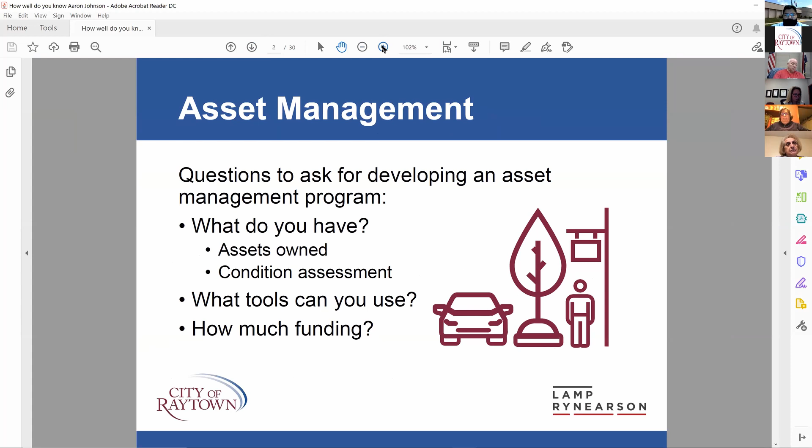So we're here to talk tonight about our pavement and our plans, after my evaluation of where we are here in Raytown, and what we believe are the best practices moving forward in terms of street maintenance. Whenever we're looking at our assets, and I know some of you have probably heard a lot of this before, but it's good to hear again: we're looking at what do we have, what streets do we own, what is the condition of our assets, our streets, what tools can we use, and finally how much funding do we have to do any sort of work.

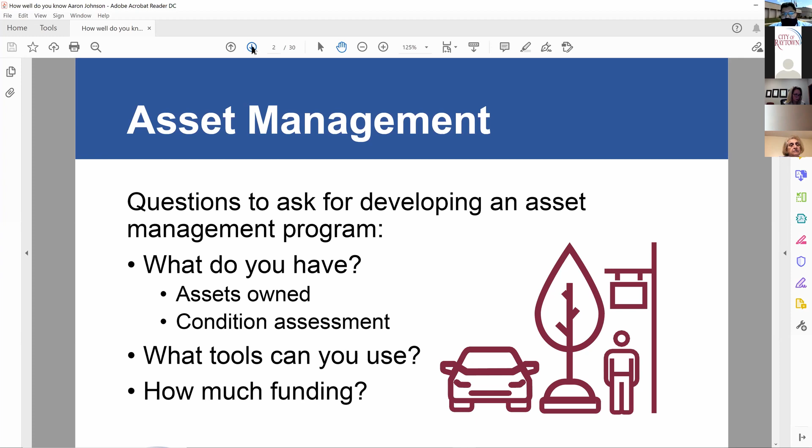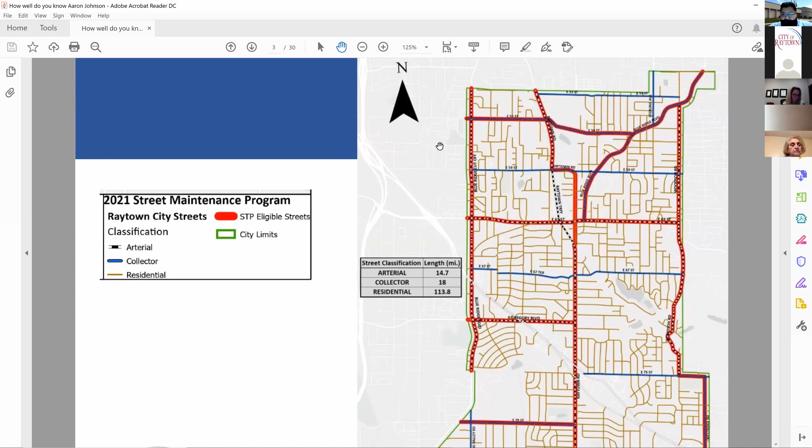This is a look at what we own. In the red, you'll see our arterial streets in the city, and then we have collector streets in the blue, and then of course our residential streets in the yellow. Altogether, we've summed this up in miles for you all to see how many miles we have in Raytown. Quite a bit of street. So approximately 330 lane miles of pavement in Raytown: arterial we have 52 lane miles, collector 38 lane miles, and residential, we have the most, 240 lane miles.

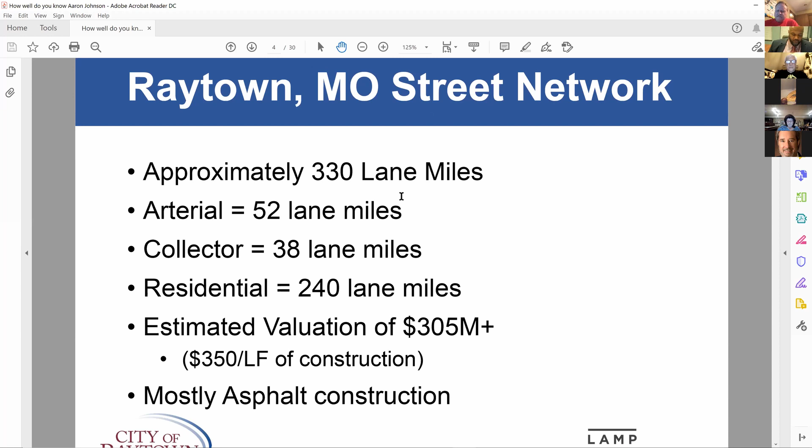We did an evaluation of our streets, with about $305 million being the valuation of our street network. And that's if we took about $350 a linear foot of new construction - if we were to just build our streets today, brand new, this is the value of them. And of course, as you all know, most of our streets are asphalt construction.

So whenever you get into pavement management, there's a lot of good material out there. A lot of engineers, a lot of scientists have done a lot of studies on asphalt, concrete, streets in general. And really the resounding theme that you get out of this is keep good streets good. Keep your good streets good - that's where your focus should be. So that's kind of the theme that we're going with this evening, is keep good streets good.

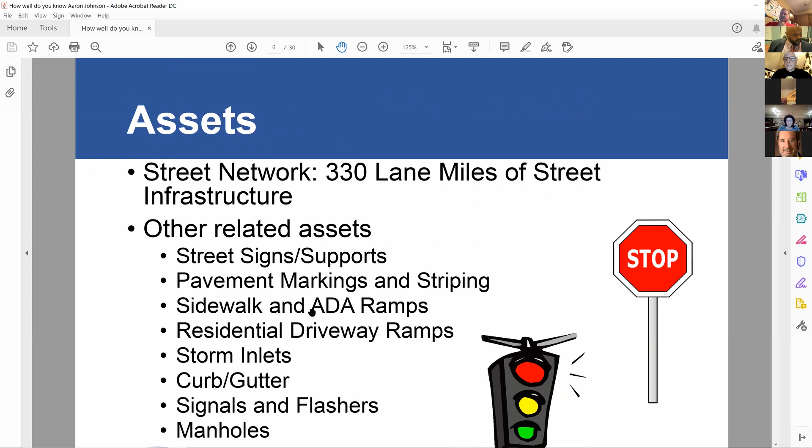It's important to note that our street network isn't just pavement, it's not just asphalt and concrete. There's also a lot of other types of assets there: street signs, markings, striping, sidewalks, ADA ramps, driveways and approaches for houses, storm gutters, signals and flashers, manholes that you see off the street or on the street. So there's a lot of other things we have to take into consideration when we're talking about doing pavement street maintenance.

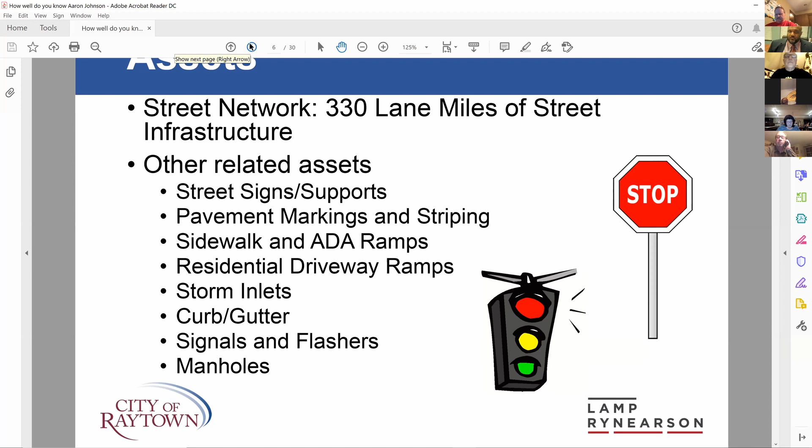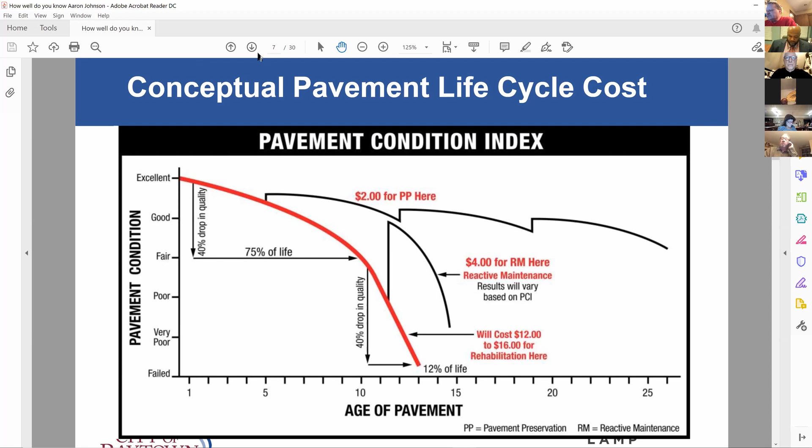So just simple math using that curve of the life of a street: if on average we touched our streets every 8 years to keep up the street maintenance, to keep the value up, or to keep up the funding and our contribution — to keep up our funding and the pavement life — if we were to touch the roads every 8 years, we should be doing in Raytown about 41 lane miles a year.

So that's a reminder, 330 lane miles. If you divide that by 8 years, 41.25 lane miles a year is what we should be doing. That's about 12% of our street network that we should be maintaining annually. One important note is that this should be a coordination between what we do in-house in street maintenance with our own staff and what we contract out. They should be complementing each other.

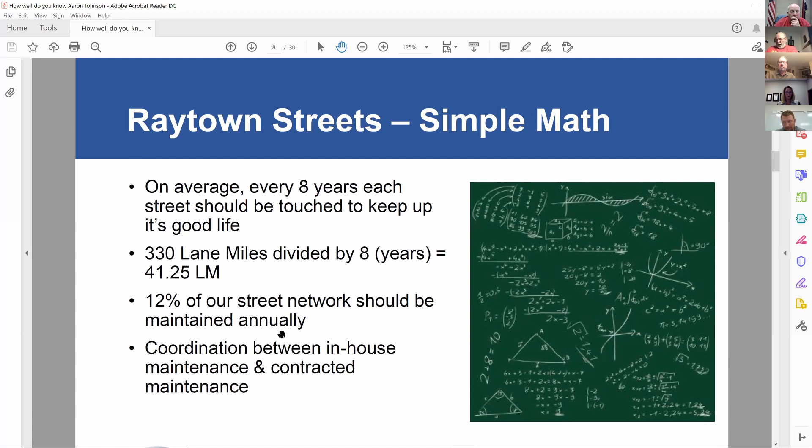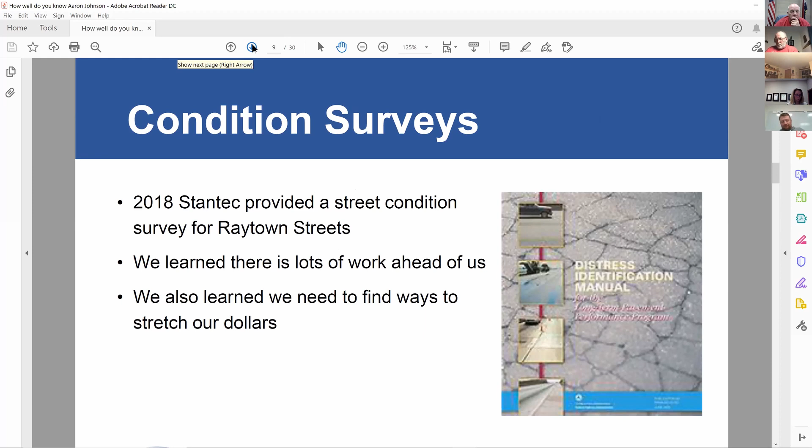So some more about what we know: in 2018, Stantec came into the city and did a street condition survey for our streets. They provided a lot of good information. I know some of you were here when they did that. Basically, we know that our streets are bad. We have a lot of work ahead of us, and we also learned we need to find ways to stretch our dollars. That's really one of the most important points this evening — we've got to find ways to stretch the dollars we have, because as we all know, we don't have a lot of dollars in street maintenance.

PCI stands for Pavement Condition Index. So when I say PCI tonight, that's what I'm talking about. It's a nationally used measurement for pavement condition. The range is 0 for the worst and 100 for the best.

PCIs greater than 70 generally are good to excellent condition — they have surface or joint problems that we can manage. PCIs between 70 and 55, that's a really critical range for us in our streets. This is where a lot of times we should be spending a lot of our focus, because if we're not giving our streets attention, keep in mind that curve, that failure of the curve, if we're not giving our streets attention in this range, this will continue to dip down into the range below 40. So then it becomes a failed or failing pavement, and it's really expensive to repair.

One important note to take out of this is that Raytown's pavement average PCI is 42. So we're just above this area here. That's a really important number to note. When we talk about performance measurement, we're going to look at this as staff and see what our first goal is on raising this number.

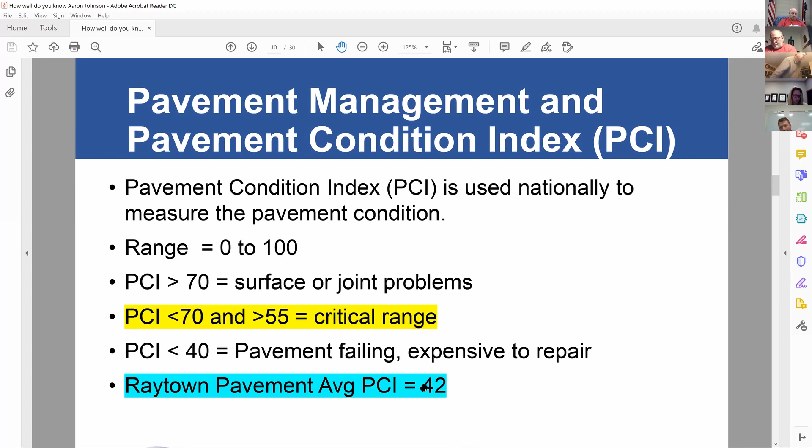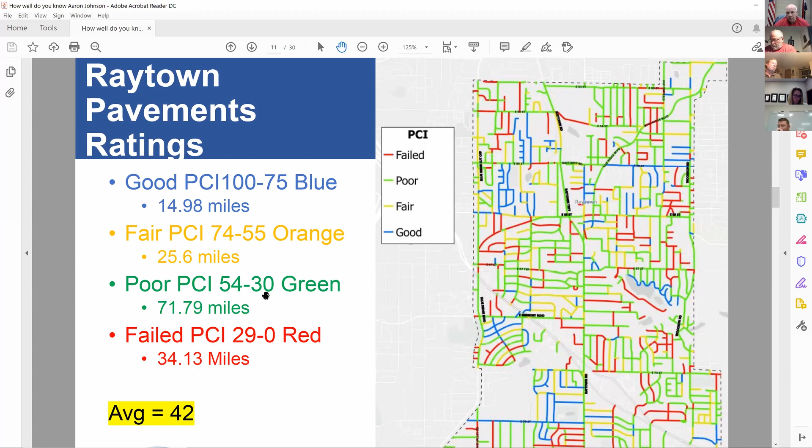So specifically, when we talk about PCIs, this is from the 2018 Stantec survey. We had about 15 miles of street that are good pavement, about 25.6 miles that are fair, about 72 miles that are poor, and these are all color coded to match this map. And then we have a little over 34 miles of pavement that is failed. We broke this into 4 conditions for you so you can see this map. Keeping in mind that our average PCI is 42, we're right in here in the poor condition as a city.

Just a quick summary of what we've done, going back to 2013. Where have we spent money on our streets? What did we do exactly?

In blue on the right, you'll see a map of the mill and overlay we've done between 2013 and 2020. And in red, the chip seal work the city has done between 2013 and 2020. These are the dollar amounts we spent for those years. One thing to note is that in 2018, it looks like the city did not have a street maintenance program because we spent that money on the 83rd Street Bridge. And there's a couple years where we really didn't do much work altogether.

In 2016, we did about $37,000 worth of concrete work. I'm not sure what that was exactly, but we went a couple years not really doing much. In 2020, same thing.

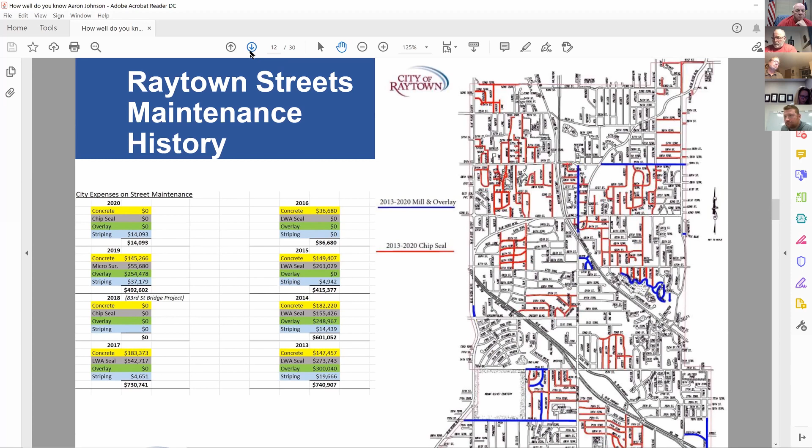And really what that means is doing more routine maintenance, which includes crack sealing, and preventative maintenance, which is surface treatments, chip seals, micro surfacing. There are some other ones we'll talk about this evening.

Again, just a reminder, based on some simple math, we should be touching about a little over 20 miles annually, or 41.25 lane miles.

The other thing we needed to do as a city is develop a financial plan for deferred maintenance and/or reconstruction. Those are the poor streets that it's not worth our dollars to invest in, or those failed streets that would just take too much money for us to rebuild. So we've got to develop a financial plan. We can't completely ignore that.

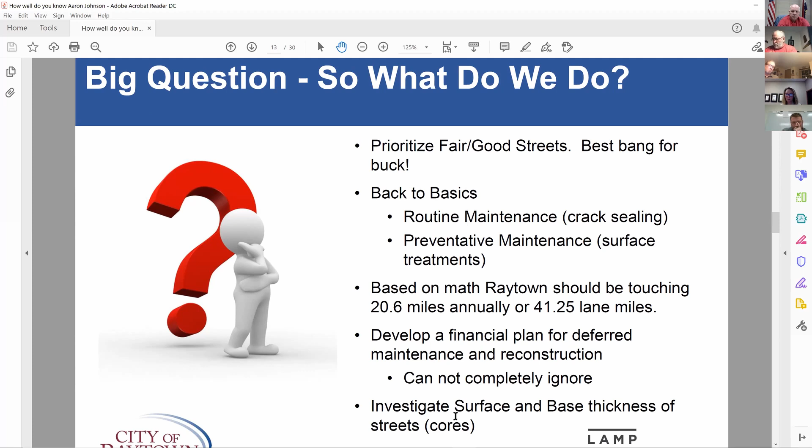And then we also want to get into the practice of investigating surface and base thickness of our streets. We'll talk about coring here in a second, that we want to start implementing here in Public Works.

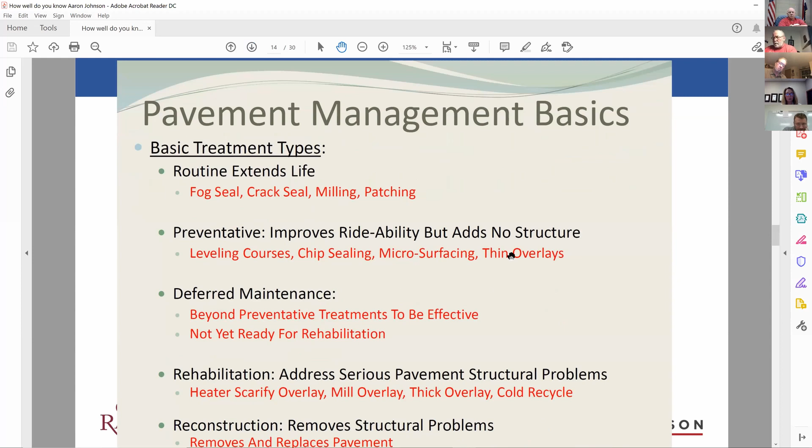So just some basics of pavement management. You've got your routine maintenance, which extends life—fog sealing, crack sealing, milling and patching—and preventative maintenance. This is your chip sealing, micro surfacing, some thin overlays. You have your deferred maintenance, which I spoke to earlier, which is it would be too much work for us to do, or at the moment we can't afford to do any work.

So we would probably let that go, since it's not ready for rehabilitation, which is more of a mill and overlay approach, or a thick overlay. Then you also have your reconstruction, which removes your structural problems—your base issues, things like that—and that's full reconstruction of the road, full reconstruction of the street.

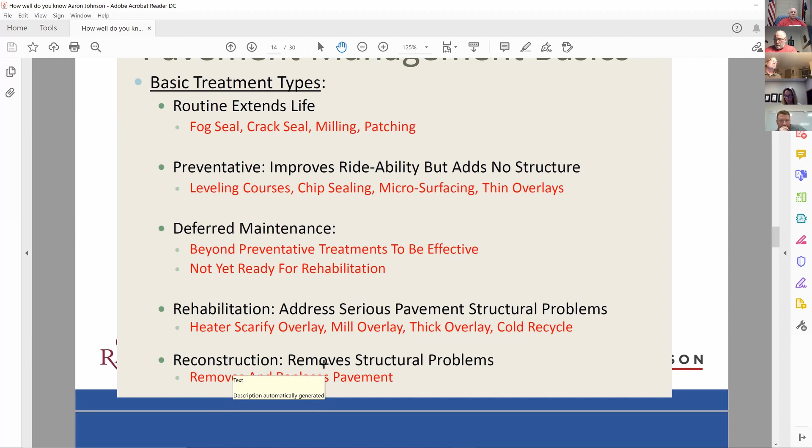So there's several different types of street maintenance. I'm going to talk about a couple that I fully believe in, that are proven strategies the city is not foreign to, and hopefully some that we can bring into the city that are a little bit newer in the market. I think you all are familiar with crack seal.

It's about $1.45 a pound. This is the black lines you see on the street that fill the cracks. It's a protective, preventative measure. It's really important because water getting into the pavement and into the subsurface is really what destroys our streets.

Granite chip seal, micro surfacing, ultra thin bonded asphalt surface—which is an acronym, UBAS—is another good approach. You're all familiar with mill and overlay, which is the more expensive approach. One important thing is that these dollar per square yard or dollar per pound figures don't include striping and some of the other things included in these projects. The most important thing here is we want to stretch our dollar by using a variety of maintenance strategies.

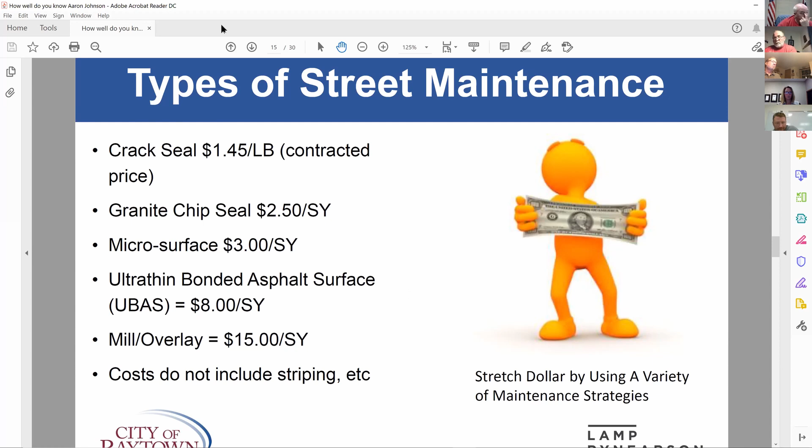To illustrate that, here's an example. This is our budget this year: $350,000 for contracted street maintenance. So if somebody were to say, Jose, why can't we just go mill and overlay everything? Well, mill and overlay takes us to about 0.83 miles, a little under a mile, and that's how much work we'd be able to do in the city.

UBAS, which is a little more expensive than chip seal but less expensive than mill and overlay, gets us about 1.5 miles, so we're doing about double the work. You can see that here on the right. And if you use a method like chip seal, you're doing over 4 miles of work based on that same budget.

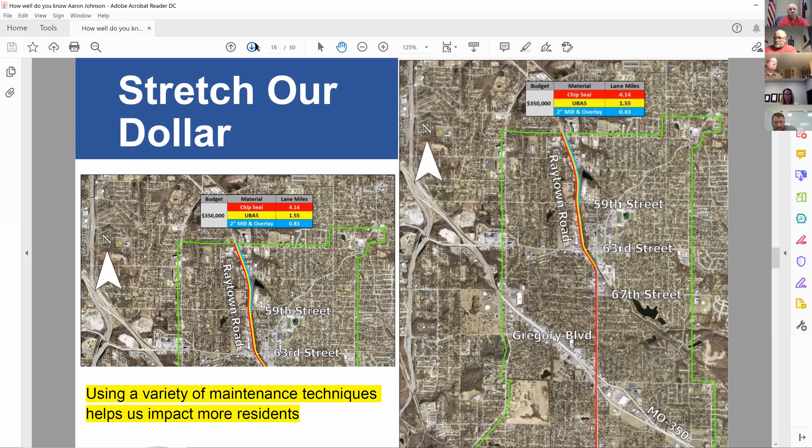The point we're trying to make with this illustration is that we can't be stuck on one method. We've got to use a variety of maintenance techniques to help impact more residents, help us stretch the dollar. More residents will see the improvement across the city, keeping good streets good.

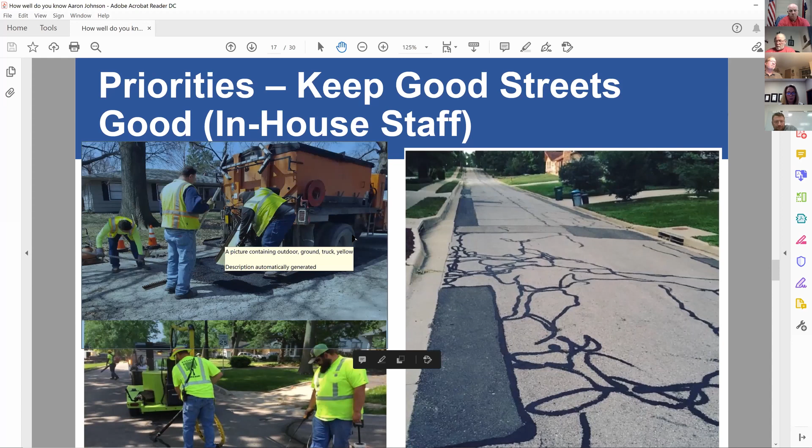Again, the point is we want these efforts to complement each other. What we do in-house with our staff, like base repairs and surface repairs, we want to make sure is done on streets that we intend to invest more money in in the future. So what they do in-house is going to complement the work we do on the contracted side.

This is the base repair our staff did in-house, and this is crack sealing. This is actually a former community I worked in. We started crack sealing our own streets, which is something we're going to evaluate here in Raytown. We're going to contract out crack sealing this year and most likely next year.

But ultimately, this is what we want to see. I know you're thinking, well, that doesn't look very pretty - I don't want to walk outside or drive down the street and see that. What we call this is prep work, where our crews or contractor have gone in and removed bad surface or bad base. This is actually a settled pavement where a pipe was put in and the pavement settled, so we went in, put in fresh surface, and then crack sealed everything afterward.

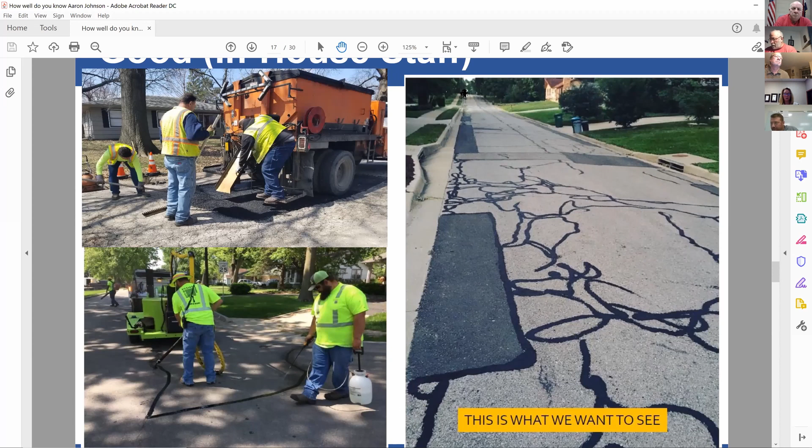So why do we do that? We'll talk about that here in a second.

Just a recap of our budget: we have $150,000 for the crack seal budget. Again, it'll be contracted this year and next year. We're going to evaluate that function for an in-house role in the future to see if our staff can do it. Hopefully one day we'll be fully staffed up, and I think it's something we can do.

This will be a priority operation for Raytown, whether it's contracted or performed in-house. This is a priority. Crack sealing is the bare minimum we should be doing in terms of street maintenance in Raytown.

In-house patching, looking at the first 2 inches of surface and base repairs on those fair and good streets in the city, preparing those streets for preventative maintenance. That photo I just showed you - that's prep work.

And then we have $350,000 for the contracted street maintenance budget - preventative maintenance, contracted preventative maintenance. We'll look at contractors who can assist in patching and base repairs as needed, and if we need to do some mill and overlay, we'll do that where it makes sense.

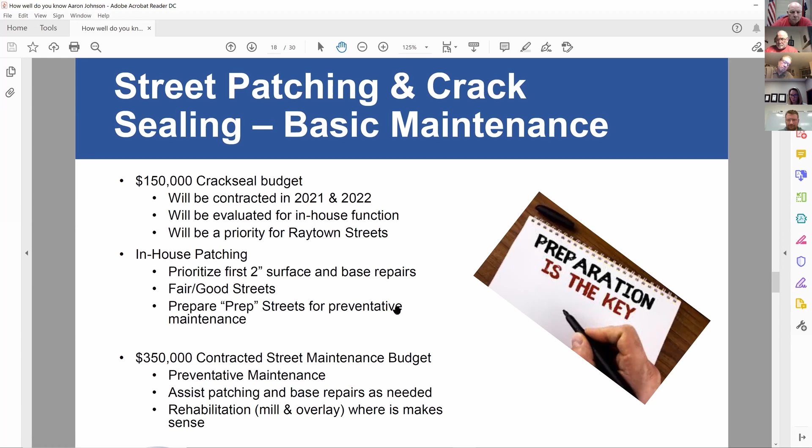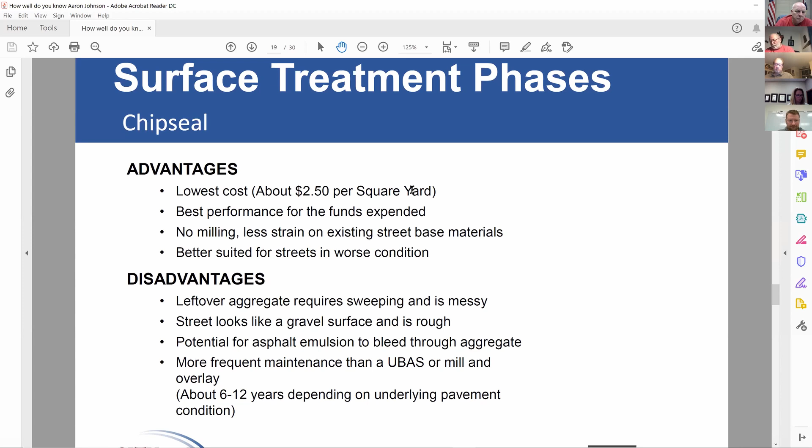So chip seal has a lot of advantages and disadvantages. One of the advantages is it's one of the more low-cost but effective measures of street maintenance. There are several disadvantages - I really don't have time to go through all of these - but this is something that is very effective and it works. Many communities do it.

One of the things I wanted to illustrate is what does it look like. You guys have seen chip seal in the city before, right? What I'd like to bring in is a new approach to chip seal: first, we go in and remove areas where the surface needs repair or base patching needs to be fixed. We come in afterward and crack seal those areas, crack sealing the whole street. Then we bring in our contractor the following year to lay down the chip seal.

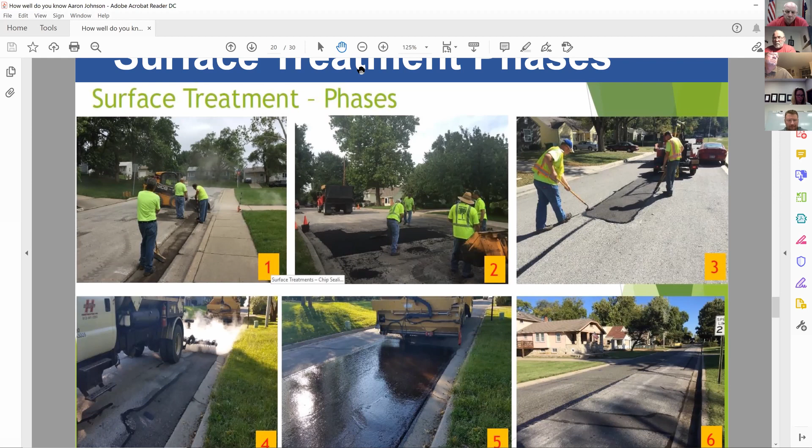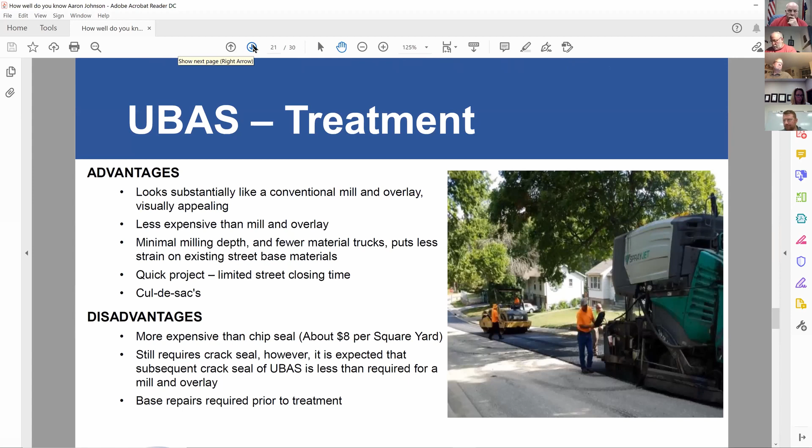UBAS is a thin bonded asphalt surface. It's a little bit more expensive than chip seal, but a lot less expensive than mill and overlay. It's really good for cul-de-sacs and areas that chip and micro surfacing isn't really ideal for.

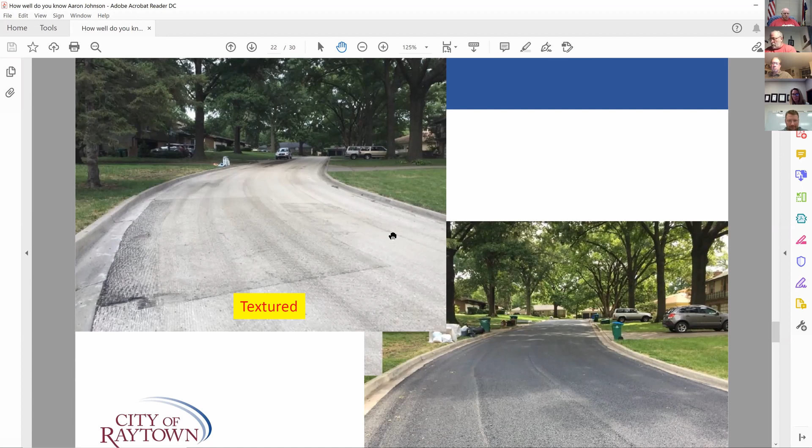It's a textured surface, so what that means is they take off the first 5/8 inch of surface. We have to make sure that the base of that is in really good condition, and then they lay on a brand new surface that's a thicker aggregate, a larger rock, if you will, with oil. It's a really good looking finished product, to say the least. It looks almost just like new asphalt.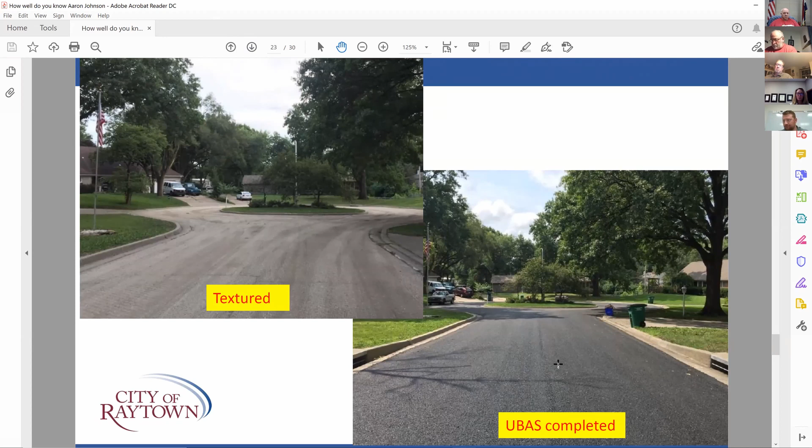So again, this is a cul-de-sac where they took off that 5/8 inch, and then they laid down this UBAS afterward. Mill and overlay, I'm not going to go through this very much. You all are very familiar with mill and overlay. You're removing the top 2 inches and you're putting down a fresh new 2 inches of asphalt surface. It's more expensive. It does fall apart within that first 7 years if you're not doing good maintenance on it, coming back and making sure that you're reinvesting dollars to protect that investment.

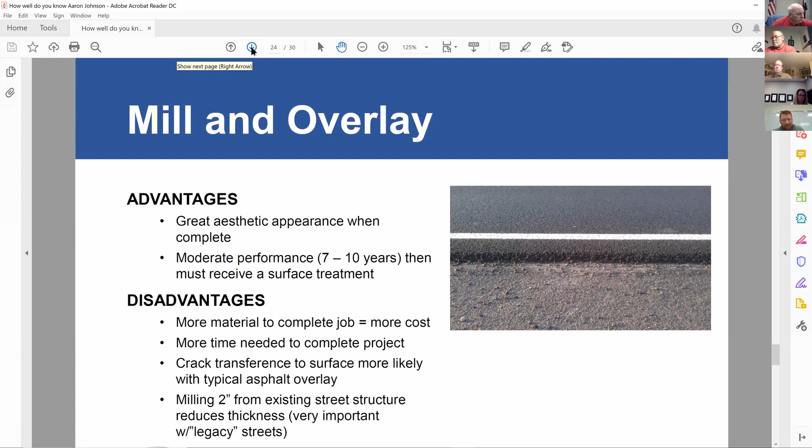Street coring, just real quick: we want to start coring our streets, and this will be in the fair and good areas as well, probably some of the higher poor areas, because we want to understand what is our pavement, how thick is it, is it really worth our dollar to put in new asphalt or chip seal or UBAS on those streets.

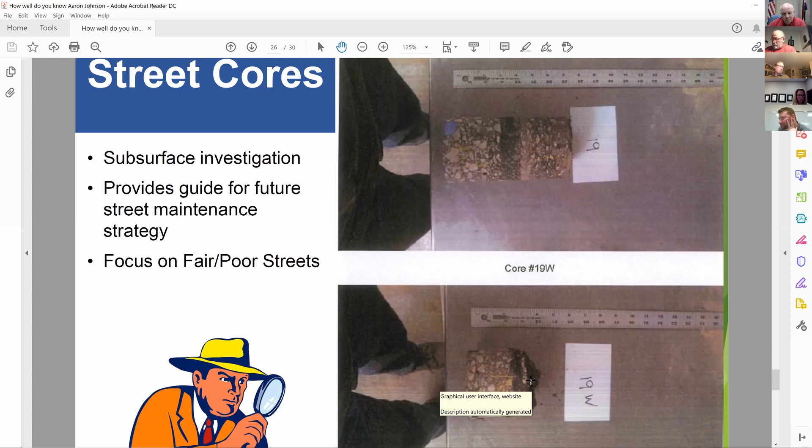As you can see here, this is actually the same street. This is on one side of the street, one area. It looks like about a 7 inch, 8 inch thick street. Other side of the street, it's about 4 inches. So you learn a lot by coring your streets. You learn a whole lot by coring your streets. And again, this is one thing that we want to bring in to the city here in Public Works.

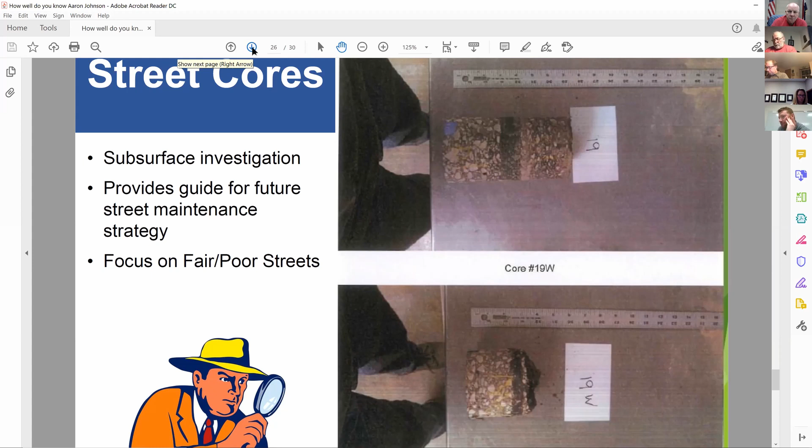So what this looks like is in 2021, we're going to start doing some prep work on our streets, focusing on those surface repairs, base repairs, crack sealing, getting our streets ready for what we're going to do in 2022, where we'll do some surface treatments, some preventative maintenance, UBAS, things like that. And then in 2022, we're going to do some more prep work on some more streets for 2023, but we're also going to, like I said, cover up the work that we did in 2021 with the surface treatment.

So it's an ongoing strategy. This does not end. This is something that we're just going to keep going. It's like a clock. We're just going to keep going through all of our streets until we touch them all one day.

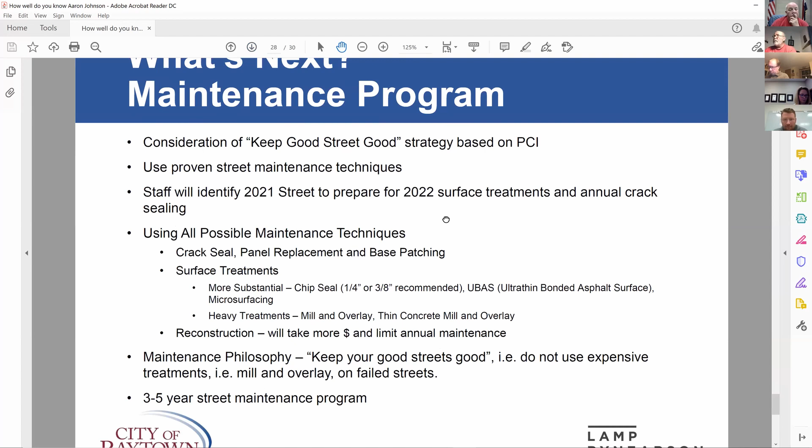Just real quickly, what's next for the maintenance program? Like I said, keep good streets good. That's going to be our slogan in Public Works. We're going to keep good streets good, use proven street maintenance techniques. We're going to focus on 2021 street prep and 2022 surface treatments with the annual crack sealing. Again, looking at reconstruction, we know that we need more money to restart a reconstruction program in the city. So that'll take care of those poor and failed streets.

And then here, I think throughout this year, really over the next 4 to 6 months, I'm going to be working with staff to develop a good 3 to 5 year street maintenance program for the city, so we're able to show you all what that looks like using this philosophy.

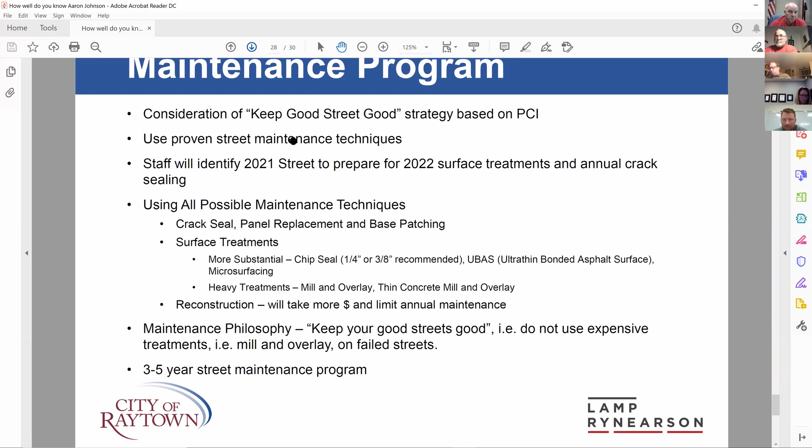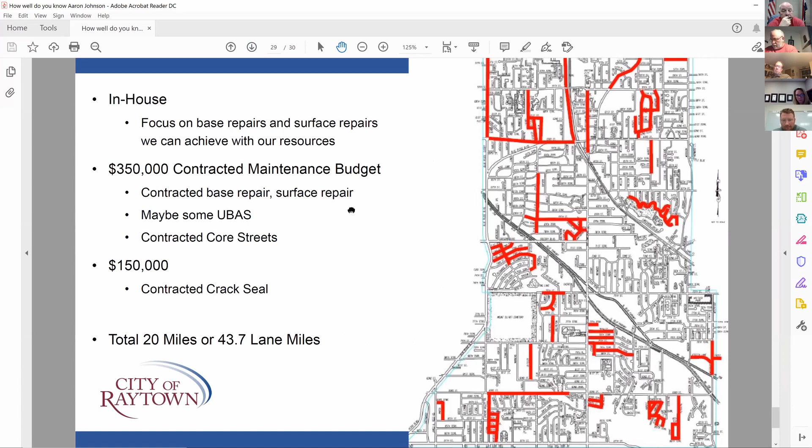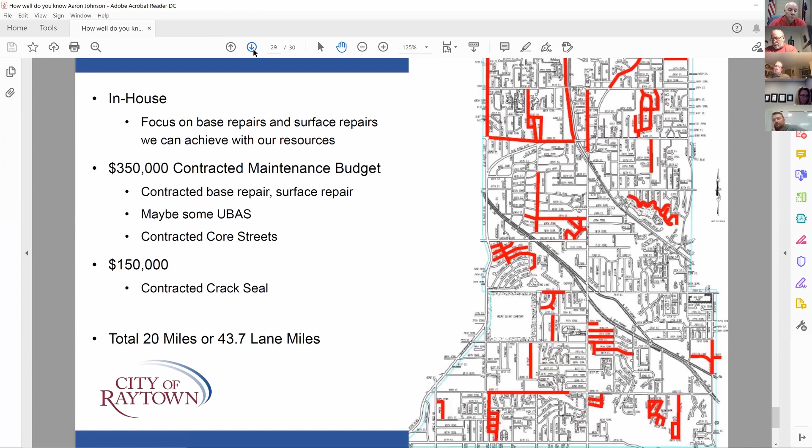This is a map showing just some candidates that we're looking at for these dollars that we have this year for crack seal and surface repair, base repair. All these streets have been identified as mostly fair and good streets that we want to continue to protect their life and don't let them fall into that poor and failed category. So this is really the streets that we're looking at this year to do that with. And that's all I got, Mayor.

All right. You want to take that? There you go. Thank you so much. Anybody got any questions for Jose? By the way, Jose, great presentation. Mr. Azure. Unmute yourself. Unmute yourself, Jim. You're still muted. We're good? There you go. What do you got?

Okay, Jose. So on the procedure that you showed us, how will that stand up to snow plows? It actually stands up really well.

I've been around a couple cities now where this has been done for several years. Actually, the chip or the surface, it'll come up, but you will not really notice the difference. It takes several years. One of the things I didn't really touch on is the life of some of these things. Once you do that prep work, the life extends. That chip seal, that microsurfacing, the UBAS, it really extends the life of those products. So I'm fully confident that we won't see much impact at all.

And last question, we have some streets that haven't been touched. Not a lot of them that are in bad shape. Some of those have kind of a spider, the cracks. I mean, so many cracks like a spider web that it's literally starting to fall apart. Would you deal with those streets the same way?